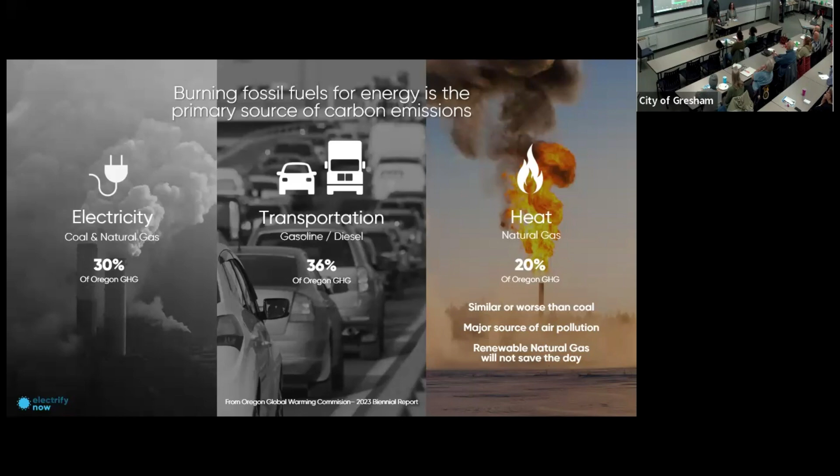In California, for example, a lot of the electrification work that's going on there is driven by air pollution. And of course, you might be hearing from the gas utilities that renewable natural gas is going to save us, and it's going to be the thing that just makes us able to stay on the gas system, but that's just not true. There's just not enough of it, for one thing. And it's also still burning. As soon as you burn anything, there are really nasty byproducts that are created from that are part of the air pollution problem in the United States. So that renewable natural gas is not really a solution.

The solution is, and this is the good news, and the thing that is the future is that there is so much energy available from the wind and the sun. And you can see from this chart here, the cost to get wind and sun energy has gone from being really expensive to being now the cheapest source of new energy, cheaper than gas, cheaper than coal, cheaper than nuclear even. So this has happened over the last 20 years. And the projections are that these costs are going to continue to go down.

And again, this is because it's the same thing that's happening with heat pumps, that the more of these things we make, because they're widgets, right? They're solar panels. The more solar panels you make, the cheaper it becomes to make them. Same is true with wind turbines. So these prices are going to go down. And this is why this is inevitable that we will be switching to these renewable sources because they're so much cheaper. But right now there's a lot of headwinds associated with that.

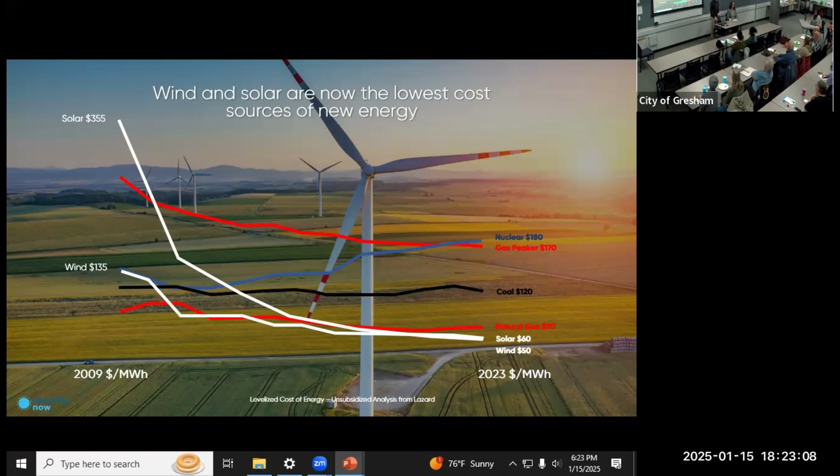And this is why all of us can play a big part in this by putting solar on our roof, which we'll talk about, or embracing other forms of renewable energy like community solar, and being part of this electrification movement to move away from burning fossil fuels in our own lives.

Okay, so let's think about this from a household perspective. As a kind of regular person, the data shows that about 60% of the emissions that we're responsible for as regular people comes from the energy that we burn in our homes. So yes, there's emissions related to the food we eat and the products we buy, et cetera, but 60% of our household emissions are from burning fossil fuels. And the big ones are our electricity consumption, which we'll talk more about.

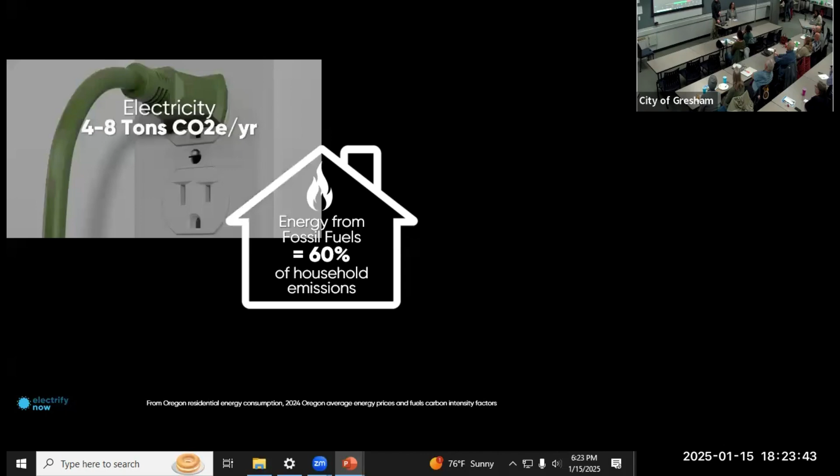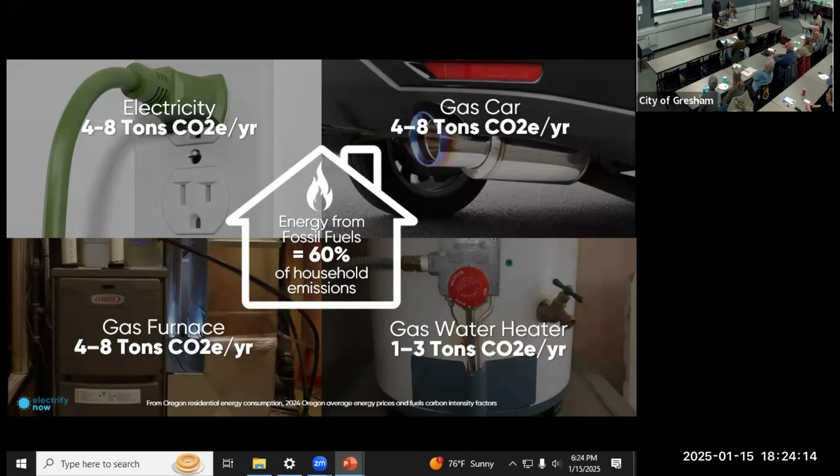Like one gas car is 4 to 8 tons of carbon emissions. A gas furnace is about the same. And of course, these numbers will vary depending on how big your house is, how much you drive, et cetera. These are average numbers for Oregon. A gas water heater. These are the 4 largest sources of carbon emissions in most of our homes. And if you have an electric home now with an electric water heater, it would be slightly less, but still these 4 things are the largest consumers of energy in our homes, and therefore the largest sources of carbon emissions.

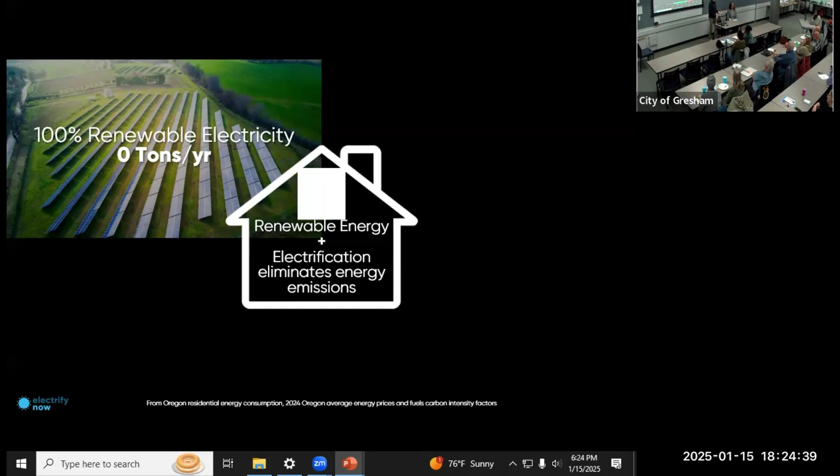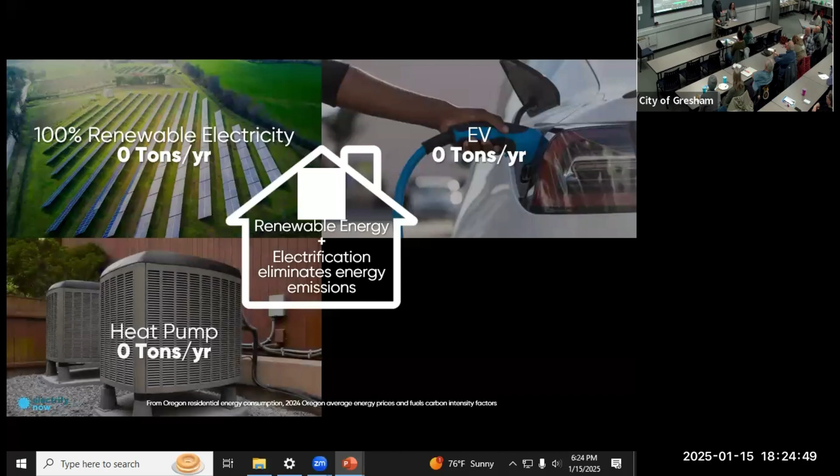There is a huge opportunity when we combine renewable energy and electrification to eliminate those emissions. We can get renewable energy for electricity. The state is on the way towards doing this. We have laws already in place that are mandating that we get to this, but you can do this right now in your own home by getting solar on your roof or subscribing to a community solar program. Then you can use that clean energy for your transportation. So now that's 0 for driving around, and 0 carbon emissions for heating and cooling your home, heating your water.

So when you look at this in total for an average home in Oregon, and again, this is going to vary depending on the size of your home, but an average home with 2 cars is 27 tons of carbon emissions every year. It's kind of mind-blowing. You don't see this, but this is what is happening through burning fossil fuels. And if you electrify that home today with the grid the way it is, you would cut those emissions in half just because of this incredible efficiency of these devices we're going to be talking about in just a minute.

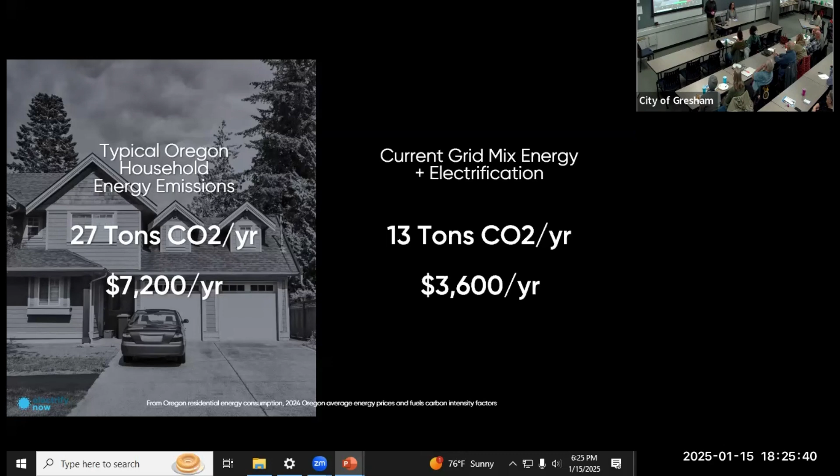And you'll cut your energy bills in half as well, which is one of the reasons why this is exciting, because a lot of people may be motivated to do this from an environmental standpoint, but there's lots of personal benefit reasons to do this as well, and we'll talk about those as we go.

But cut your carbon emissions in half, and then of course, as we go towards renewable energy, with an all-electric home, it's possible to get to zero emissions. It will never be possible to get to zero emissions if we're burning fossil fuels in our homes. So that is why this is such a powerful thing for us to know about and to think about doing.

That's why you hear people talking about this idea of electrifying everything, which is kind of conjuring up this future where we get power from the wind and the sun for our electricity, and then use that electricity for transportation, and use that electricity for heating and cooling our homes. And there's these incredible side benefits.

You know, I came into this conversation really focused on carbon emissions, but I realized from doing this that there's unbelievable energy cost savings that roll up to hundreds of billions of dollars when you look at the United States in general, as we transition away from fossil fuels.

It delivers clean air, because think about it for a minute, where does air pollution come from? It comes from our cars that burn fossil fuels. It comes from power plants that burn coal, etc. So it comes from burning stuff. So the sooner we get away from burning things, the cleaner our air will be.

There's amazing amounts of water that's used for processing fossil fuels that could be available for much better uses like drinking or agriculture, for example. All this leads to healthier people, which means that we're spending less money on healthcare and less money on energy, which is better for the economy. So there's lots of exciting reasons to do this beyond just the environmental impacts.

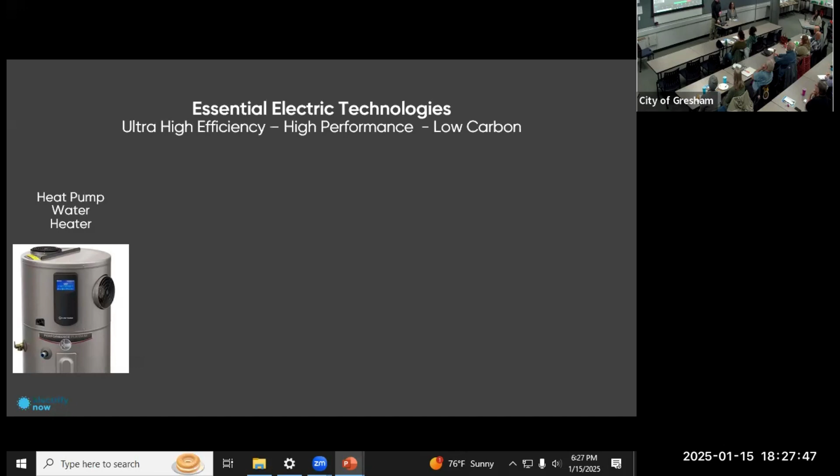So heat pump water heaters, we'll talk more about it. Heat pumps for space heating is another key technology. Induction for cooking is so much better than cooking with gas, even though gas has this reputation as being the best cooking technology. It gets blown away if you ever experience induction. We'll talk a little bit about that.

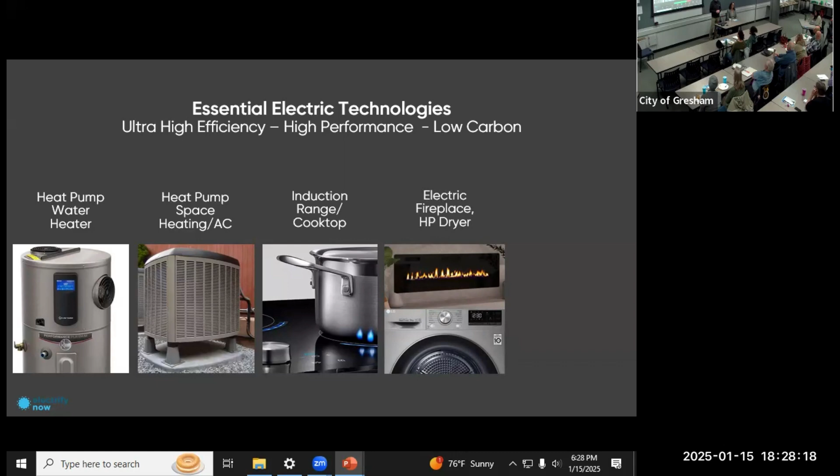We won't be talking about this so much today, but even electric fireplaces are out there. It's a thing. You wouldn't even know the difference between an electric fireplace and a gas fireplace if you saw one, but they don't burn fossil fuels. Heat pump dryers are incredibly energy efficient. And then, of course, electric vehicles, which we will talk a little bit about. But this is kind of the suite of technologies that enables us to take any home, any apartment building, any commercial building, and get off of fossil fuels for heating and cooling and cooking, etc.

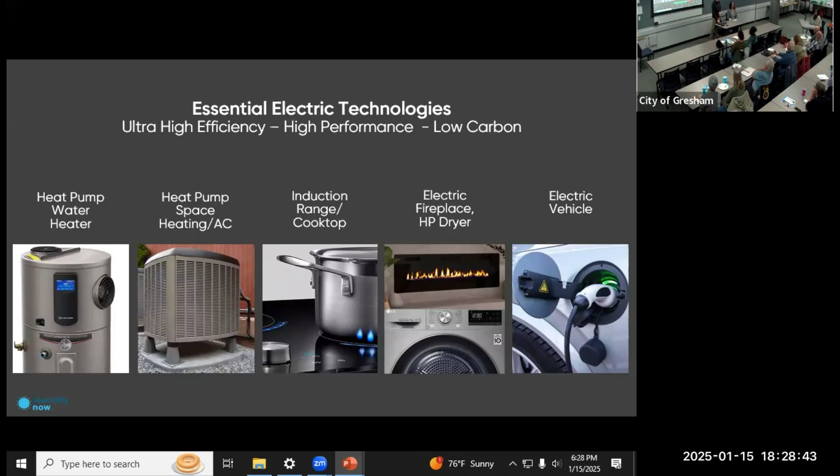Okay, so you've already heard me say this word heat pump many times, and a lot of the technologies we're talking about relies on heat pumps. They're really incredible devices. I'm not even going to try to explain how they work because they're a little bit magical in some ways. But I think the simplest way to understand them is that they've been in our lives forever. A refrigerator is a heat pump. The air conditioners in our cars and our homes are heat pumps. So this technology has been around literally for 100 years. It's just become more and more perfected over time.

The way a refrigerator works is that it's moving heat from inside that box into your kitchen. You don't really notice this, but your kitchen is getting slightly warmer because your refrigerator is getting colder. If you put your hand behind there, you can feel the heat coming out of it, or sometimes there's heat being evacuated from underneath. It can be literally freezing inside your refrigerator when it's 100 degrees in your kitchen.

So these things are incredibly efficient in moving heat from one place to another, and use little tiny motors and pumps, very little energy to move heat from one place to another. So that is the magic that makes a lot of these things work. A heat pump water heater is, in some ways, the easiest to understand because it's like a refrigerator in reverse.

So instead of making your room warmer by cooling what's inside of the refrigerator, a heat pump water heater is going to make the space that it's in slightly cooler in order to absorb that heat and concentrate it into the water that you're using. So they look just like regular water heaters, but they're absorbing heat from the air, exporting cool air, and then using this refrigerant that circles around the water tank to heat the water.

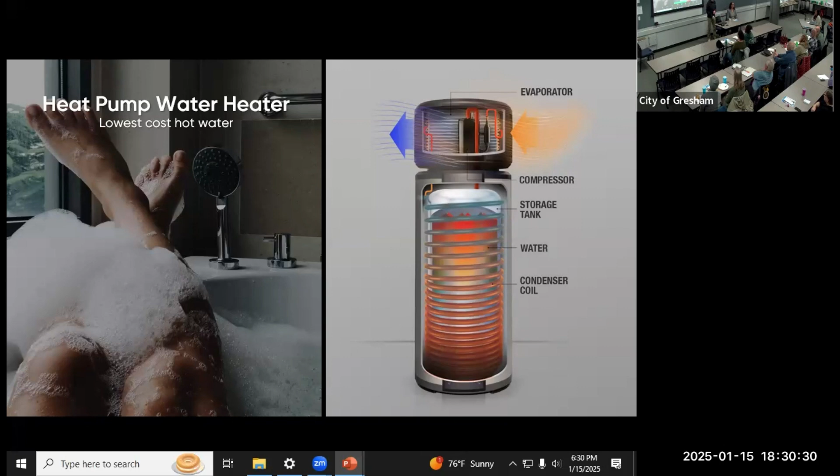And you can get water up to 140 degrees or even hotter with this technology. Plenty hot for what we need in our homes. All the major manufacturers who make water heaters today are making heat pump water heaters. They've been around for over 20 years now. They have incredible warranties. This is not some kind of fringe technology that's brand new.

A warranty on a gas water heater is 6 years, by the way. A warranty on a heat pump water heater is 10 years. It gives you an idea of how much confidence the manufacturers have in this technology. This is here to stay. The federal government is essentially trying to get this to be the new standard for water heaters, period. And one of the reasons for that is what you see over here, cost of operations.

A heat pump water heater on average is going to cost a little over $100 a year to operate, compared to the most efficient technology out there, a gas tankless water heater, at 350. So that's 3 times more money every year you're spending for what was the most efficient technology until heat pumps came along. So heat pumps just blow everything away in terms of cost of operations.

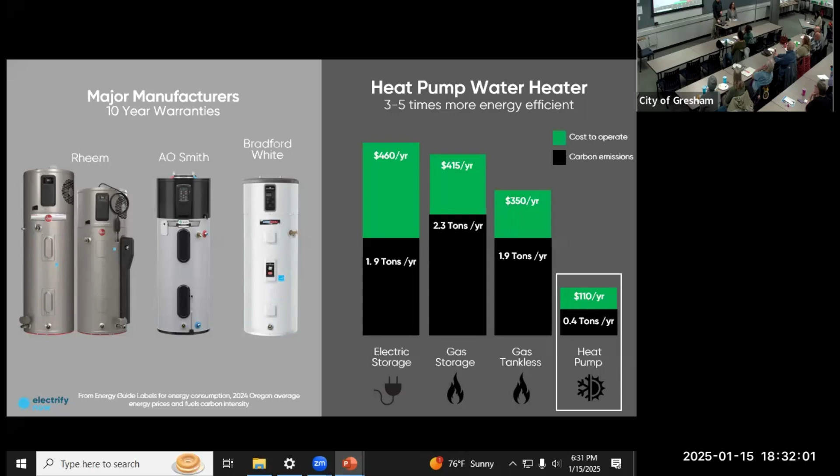And because of that energy efficiency, it also means that the carbon emissions they produce are teeny compared to these other technologies. And if you do what you're going to hear about in just a minute, this would be zero, literally zero, because if you're powering this with renewable energy, this goes to zero. There's no way for this to be zero, because they're burning fossil fuels. So really amazing technology. There's unbelievable incentives.

We'll talk more about this later, but this is information that's available on our website: you can purchase a heat pump water heater for $700. They retail for more like $1,600. That's an incredible savings. That essentially makes these things about the same cost as installing a standard low efficiency product. That's why the incentives are so important. So more about that to come, but that's one of the key technologies.

The other one is heat pumps for space heating. These things have also been around for a long time. Some whole countries use this for space heating, like Finland and Norway. Really cold places have been using heat pumps for a long time. So there's no reason to think that these things aren't going to be powerful enough to heat our homes here in the Northwest. The coldest places in America, like Alaska, Maine, and Vermont, are embracing these devices.

They are incredible because, one, of their energy efficiency we'll talk about, but they also lead to more comfortable homes because they operate relatively consistently. If you think about a gas furnace, for example, when you turn it on, it's creating unbelievable amounts of heat, way too much heat to really use, like thousands of degrees, literally. So the way that you make it work is you turn it on and off all the time so that your house doesn't get too hot.

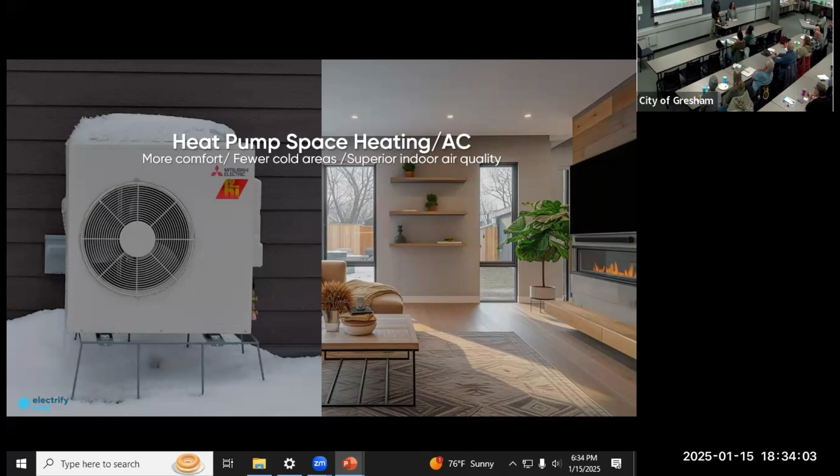And with a heat pump, it's producing temperatures that are more like 120 degrees or maybe even less. It depends on the situation. So they're operating almost continually. And what that means is that you've got more air through your filter, which means cleaner air. You have that air moving into every corner of your room. So you're likely to get really consistent temperatures throughout your whole house, no cold spots, which leads to noticeably more comfortable homes. So they're good from that standpoint, and we'll see the energy efficiency standpoint in a minute.

They come in basically 2 forms. You see them in what's called a ducted or central system. So if you've got a gas furnace now, for example, you would replace that gas furnace with an air handler, which is blowing the air through the same ducts you already have. You have this external unit that's harvesting the energy from the air and then converting that to either heating or cooling, because it can do both, which is one of the other magical things.

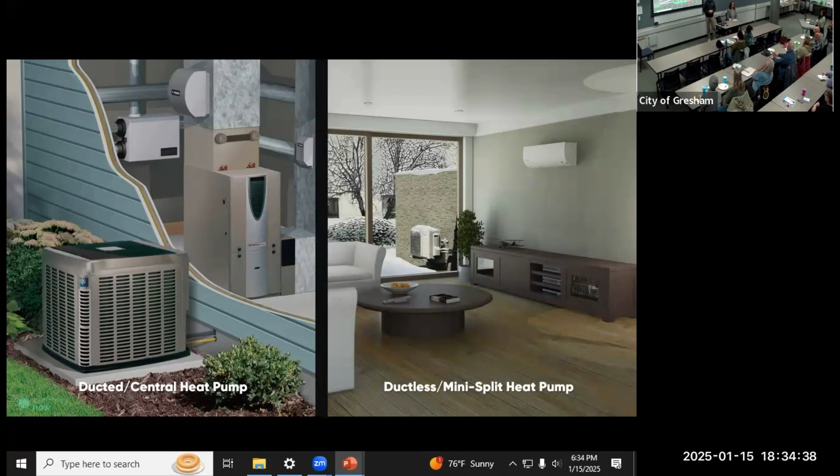It essentially replaces an air conditioner for cooling. If you don't have ducts, if you've got electric baseboard heating, then one of these ductless systems would be what you want. It has a similar unit outside, but instead of blowing air through ducts, there's these mini splits, they're called, or high wall units. They're usually mounted in every room to blow warm or cool air into the room for conditioning. And in some homes, you might combine these.

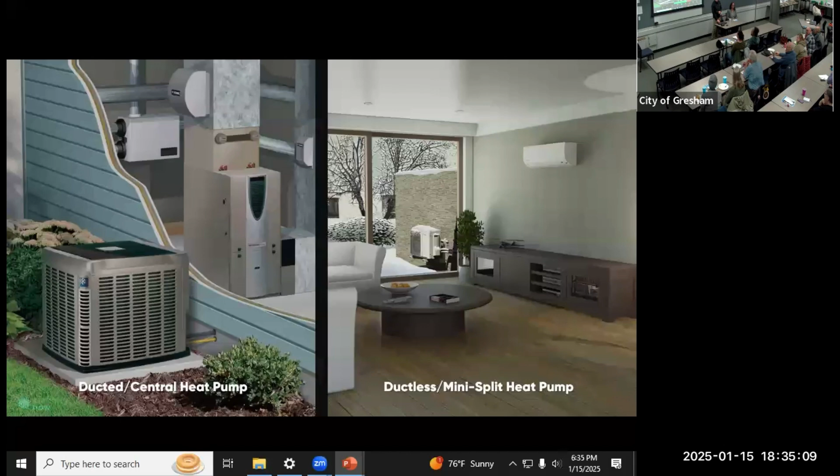Yes? I have a heat pump in my house right now. And when it gets down to about 34, 32 degrees, my electric strips come on. So are the new heat pumps made differently so you don't have to use electric strips or what?

That's a great question. If you didn't hear that question, basically the question was about what happens when it gets cold, because some of the older generation heat pumps will work really well till about 30 or 35 degrees, and then they'll switch to some sort of backup heat, either a gas furnace or electric strip heating, electric resistance heating. So a lot of us might have these older heat pumps that have this backup situation, which is electric resistance. And that actually typically works fine.

You might not even notice it, but one of the downsides of that is it's more expensive when you switch into resistance mode, because now you're not as efficient. So your bills are going to go up. And it's not a great thing from an environmental standpoint as well, because you're just using more energy. So the newer versions of heat pumps are capable of providing heat down to 5 degrees or lower. Some of them will go down to -13 with all their rated output.

So there is this new generation of heat pumps available that make it possible not to need that kind of backup resistance heat, particularly here where we have a climate where it's very rarely going to get below 20 degrees. And even if it does, these things are going to keep your house warm. So if you're thinking about this, make sure you have a really good conversation with your contractor about what that set point temperature is, where it would go into backup heating. Typically, you're going to spend a little bit more for a unit that is capable of going to lower temperatures, but you're going to get that payback by lower energy bills.

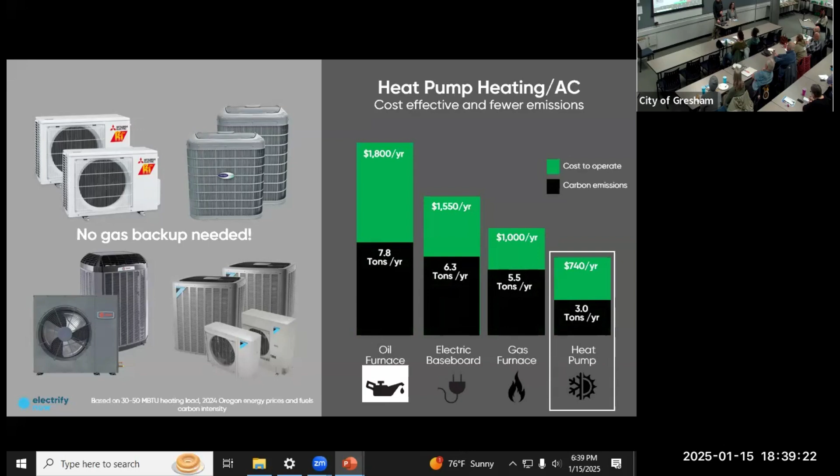And the other thing that I think is really exciting that you see happening, I pay very close attention to this. You know, 5 or 6 or 7 years ago, gas furnaces were massively outselling heat pumps because that's just what people knew about. That's what people were comfortable with. But as more and more people understand the advantages of heat pumps, this has completely changed. So now the vast majority of systems being sold are heat pumps because people just get it.

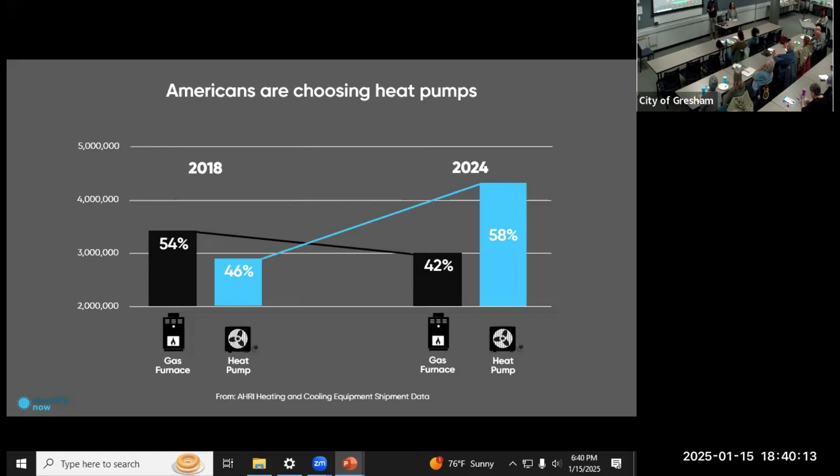They're better. And I think in 2025 these numbers are going to go up and these numbers are going to continue to go down for this reason. So what I like about showing this is, if you're thinking about doing this, it's not like you're alone or that you're on the cutting edge of technology. This is a big movement that's happening across the country.

Question over here. I had some questions of the company we work with. I was wondering if there's any resources out there for... Yeah. I really had trouble finding. I love that question. The question was essentially, to paraphrase, the contractor that she worked with, and this is not uncommon, might not be very familiar with heat pumps, or they might prefer to sell you a gas furnace because that's what they're most comfortable with.

This is not uncommon. So I think one of the things that's hard as consumers, when we call an HVAC installer and that person is sitting across the table from us, they're kind of the expert, right? Not us. So if that person says, well, if it was my home, I'd put in a gas furnace, it's hard to argue with that, most likely a guy, because they've been doing this their whole career. But the truth is that if you find the right contractor, there are people who've installed hundreds or thousands of heat pumps, have had really good success, and know how to answer your questions about what's right for your home.

So at Electrify Now, we realized early, because we had this experience with our own home where someone was trying to talk us out of these things, and we have developed a list of contractors that we feel really comfortable with, that know the technologies and give you good service. In some cases, they'll even pass on a little discount because we send them a lot of business. We don't want to make money off that. That's not who we are. We're a volunteer organization. We'd like to pass that savings on to you. All that information is on our website. I'll show you later, but it's really important to make sure you're working with the right person.

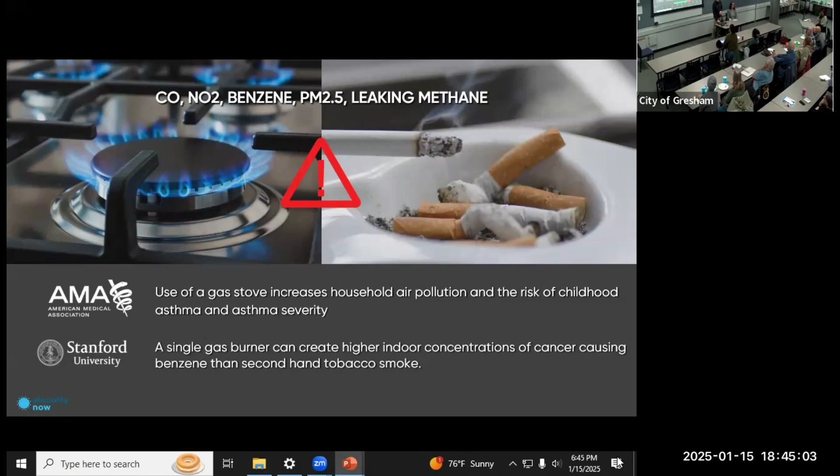The American Medical Association said that your kids are 42% more likely to develop asthma if they live in a home where a gas stove is being used to cook. And Stanford has said that even a single gas burner in a stove is basically like having secondhand tobacco smoke in your home regarding your risk of developing cancer from benzene and other chemicals that come from that. So it's no joke. These things are not safe.

Induction has none of those problems, but it also doesn't leak methane into your homes, which is also a problem more and more that we find with gas appliances. There's no risk of fire, essentially. The surface stays cool because the only thing that gets hot is the pan. The molecules in the pan are excited by this induction coil. And so you get incredible energy efficiency from that, but also real safety benefits.

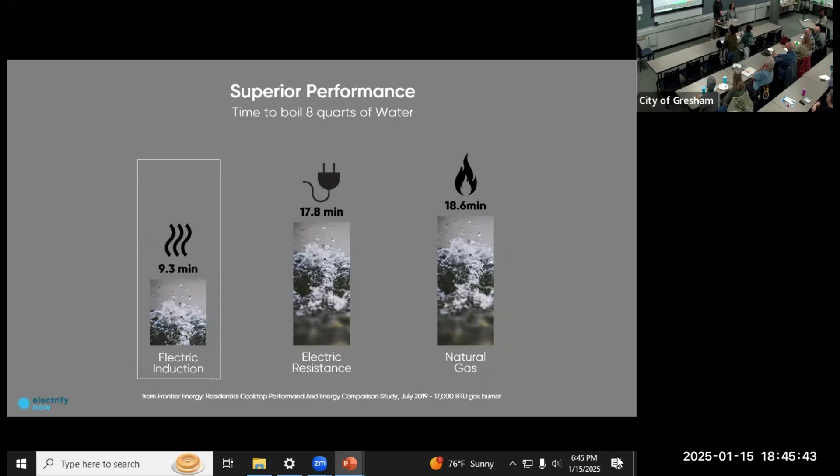And they also heat your water or anything faster. This is a study that was done by an outfit in California. Literally twice as fast to boil water with induction than even a really big gas burner or electric resistance. So lots of reasons to be excited about it.

Finally, just on electric vehicles, most of us kind of understand electric cars. You see them more and more. If you've ever driven one, you'll know they just blow everything away in terms of acceleration, cornering, you name it, in terms of performance. But one of the things that most people don't appreciate about EVs, because we all have this impression that they're more expensive, which is true to some degree because the sticker prices are higher.

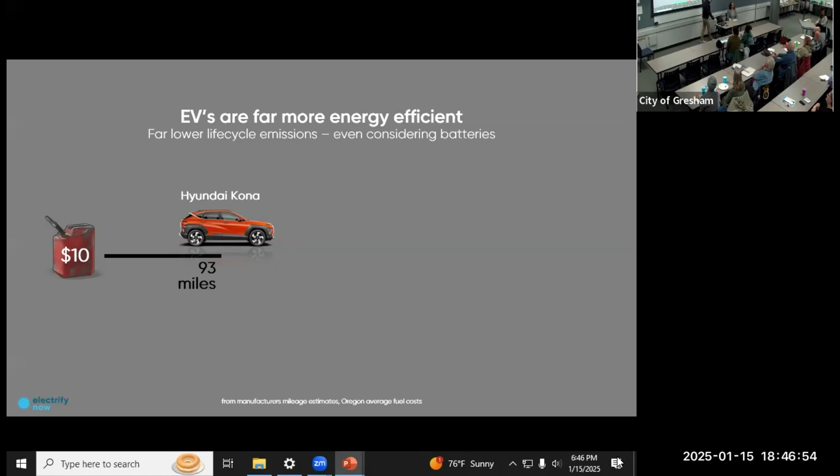But check this out. This is a comparison between two versions of the same car, the Hyundai Kona, which is a really nice little gas car. Gets about 32 miles per gallon. So with $10 worth of gasoline, you can go about 93 miles. The electric version of the exact same car, you could hardly tell the difference, except this one's got an electric motor in it. For $10 worth of electricity, you can go 262 miles.

So this is why the industry recognizes that this is inevitable, but it's also why, even though that sticker price is higher, and those things are getting closer and closer all the time, this one is about $8,000 more than that one right now. It used to be 12. But when you factor in the rebates that are available and also this cost of ownership thing, within 5 years, you're saving thousands of dollars every year. So no reason to be shy because of the sticker prices. And then, of course, from a carbon emission standpoint, these electric vehicles blow the gas ones away.

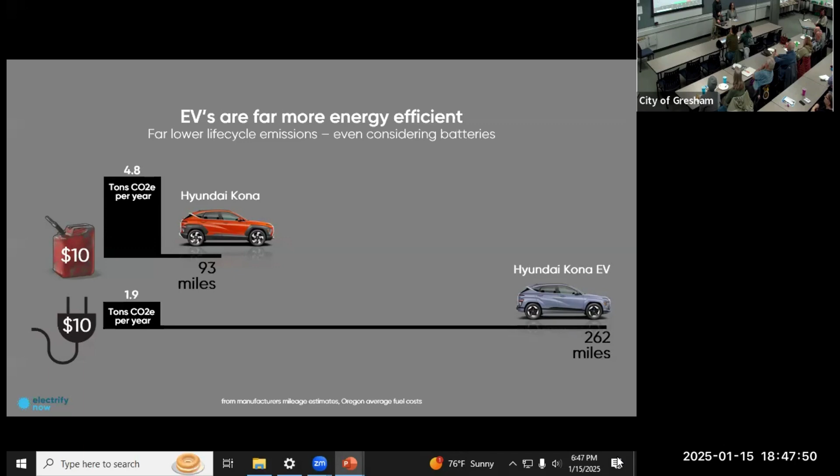And this is a really good apples to apples comparison of these two vehicles. You're at less than half the emissions, and it goes to zero if you use renewable energy. And again, the same thing is happening here as with heat pumps. It was roughly 10% of auto sales last year, up from like 1 or 2 just a few years ago. And here in Oregon, it's 16% of sales. That's why you're seeing more and more of them on the road. People are getting the word.

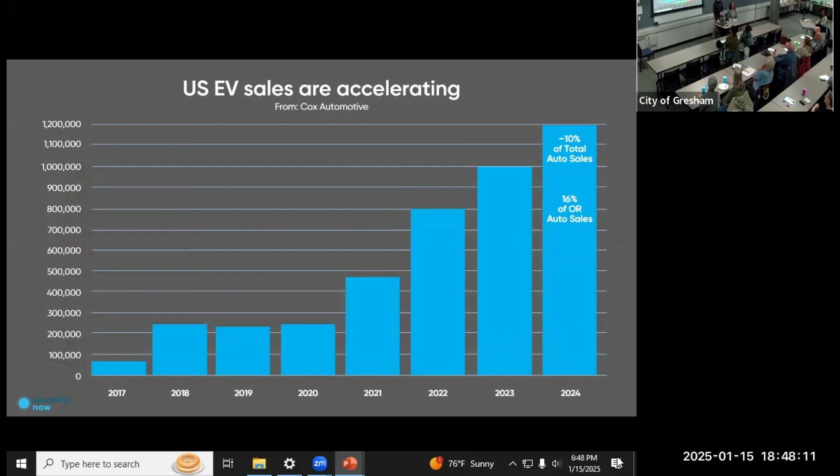But the IRA provides these amazing federal tax credits. So if you have a tax burden now, you can get incredible tax credits. Sorry, I was struggling for the words, not rebates. Tax credits for some of these devices, like it's $2,000 for a heat pump water heater, $2,000 for a heat pump. But the state, like through the Energy Trust of Oregon, has huge incentives for water heaters and heat pumps also. You combine that, you're talking about thousands and thousands of dollars that's available to you.

A lot of these have different income requirements, et cetera, and some of them come from utilities and have different utility requirements. So you really need to dive into your personal situation to know what number is out there for you. But these are big numbers, including for EVs, energy audits, weatherization, et cetera. Question? So these companies that you've done some research into locally, installers, so on and so forth, they're gonna know about all these things?

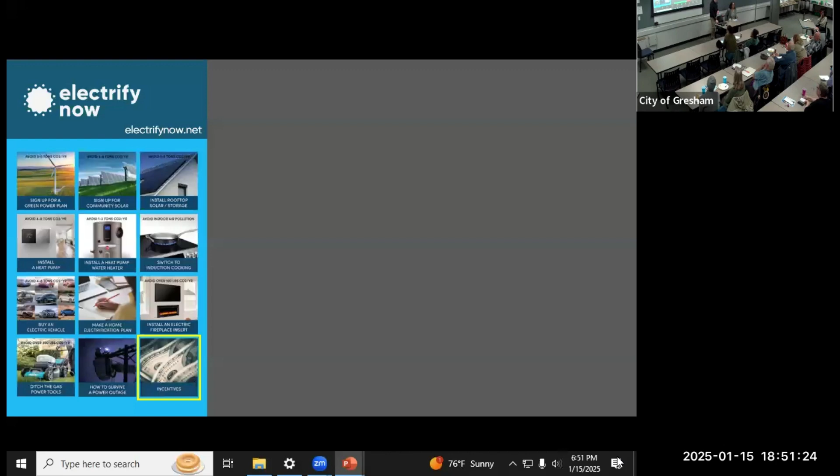Here's some sources. First of all, this is our website. If you go to our Take Action page, it looks like this, with information about how to do all these things that we just talked about, depending on what you're interested in. If you're interested in an electric vehicle, go there, etc. And then there is this incentives page, which has really good information about the incentives that are available from the federal government and other places.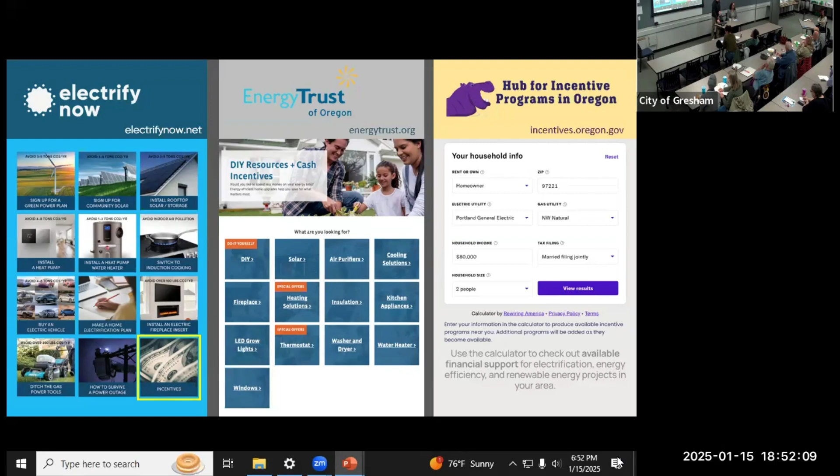Incentives.oregon.gov and energytrust.org and electrifynow.net. Those are the three that I would recommend you check out.

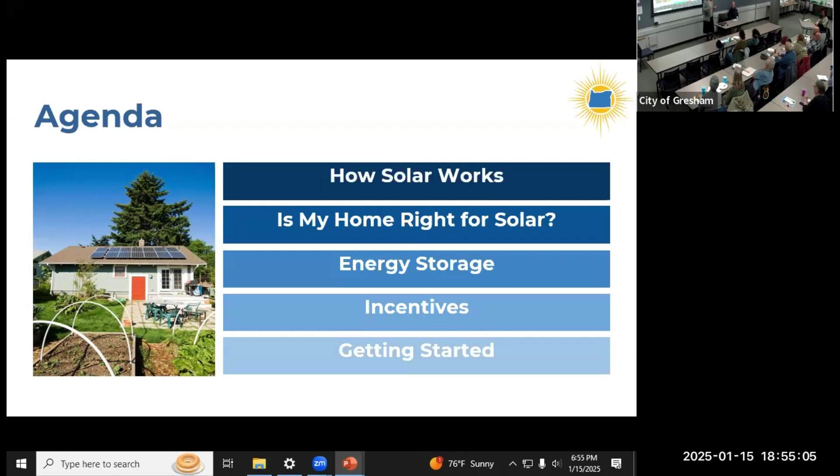So a little bit about Solar Oregon. We are a nonprofit, and we really focus on education. So educating folks about solar and storage. We do that through events like this, workshops. We also do tours in person. So we had a tour yesterday, which is great. So if getting in person and checking out local projects is something that you'd want to do, you can follow us and join more of our events.

And then we are a member-based organization, and so our members do get discounts on our Go Zero tour, which is our annual tour of homes that have solar and are on a path to zero energy. Does anyone know what a zero energy home is? We use that terminology. Yes. Is it like the living building challenge? That's a good direction. Yeah, you're bringing up a lot of terminology.

So for zero energy buildings, they usually have a lot of these energy efficiency measures that Brian talked about, like heat pump water heaters, so that they're reducing their footprint. And they usually have solar and sometimes storage so that they can use renewable energy. And then passive house is another term that you brought up. Passive house is a way of designing houses to be more efficient in their design. We have an annual tour for that. So if that's something you're interested in, you can join us in the fall. We have some in-person sites, and it's fun to go see what your neighbors are doing and what energy efficiency and solar projects they have installed in their home.

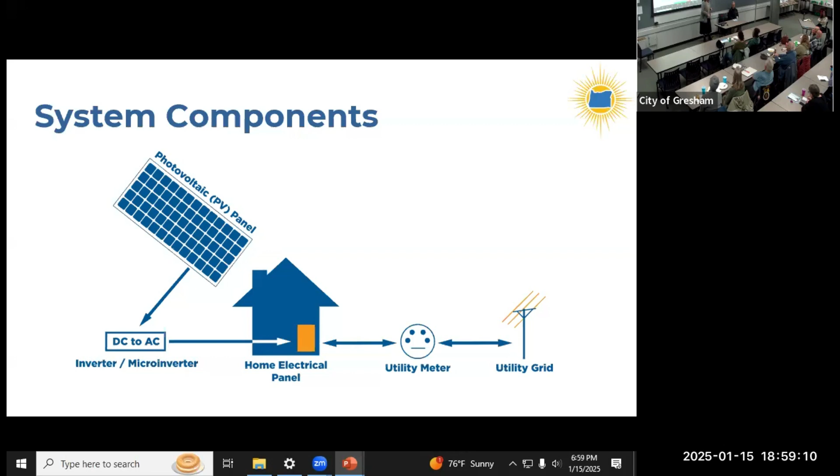And then there's a special agreement called net metering. And so this is the agreement where you get credit for the energy that you send back out to the grid. So has anyone heard of net metering before? Yeah, okay. So here in Oregon, you can do net metering. And so for PGE, it's a 1-to-1 right now. And so when you sign up and you get your solar and you're interconnected, you will be part of this net metering program where you can gain credits.

And this credit system, it starts during the sunnier months. So it's actually going to start in April so that you can build up credits from the electricity that you produce with your system. And it's going to build a bank of those credits that you can pull from when you need to draw from the grid.

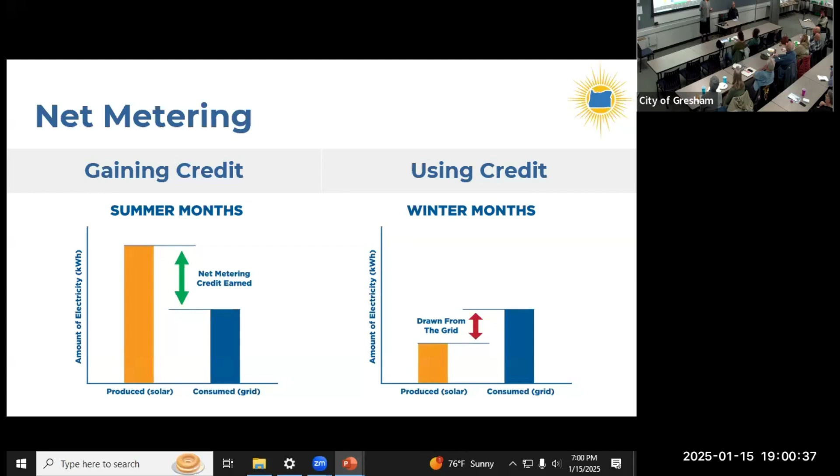So you can see here a typical summer month. So you might be producing more. It's sunny, it's not cloudy. We have less rain, so you're producing more. And you might be producing more than you consume depending on your system, because like I said, it's really customizable. And so you'll have a net metering credit earned, and that would go into your year-to-date bank. And then you could pull on that in a winter month when your system might be producing less.

Like I said, the net metering year starts in April. And so it goes all the way through March 31st. And at the end of that, you don't get like a magical check payout for that. What happens is that anything that you don't use will be donated to the grid to low-income subscribers. So it is still doing good, and you're sending that energy out to your community. But it's really important to match your consumption to your system design so you're not ending up with a ton of extra export.

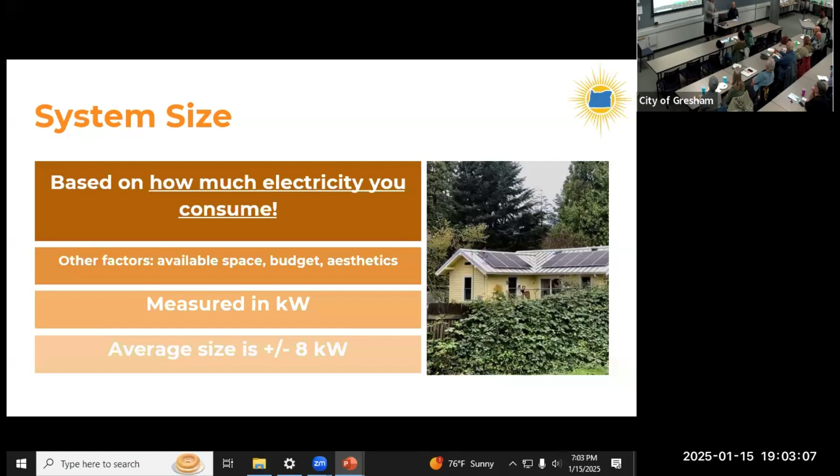All right, so we're just going to jump into some ways you can assess your home and decide if it's right for solar. First, you need access to the sun. Pretty obvious, right? So you need to be getting some sunlight on those panels so that you can create electricity. And so here in Oregon and most places, the south-facing roof is going to be the best. Solar is also installed on east and west facing, but you normally will not see solar installed on north-facing roofs.

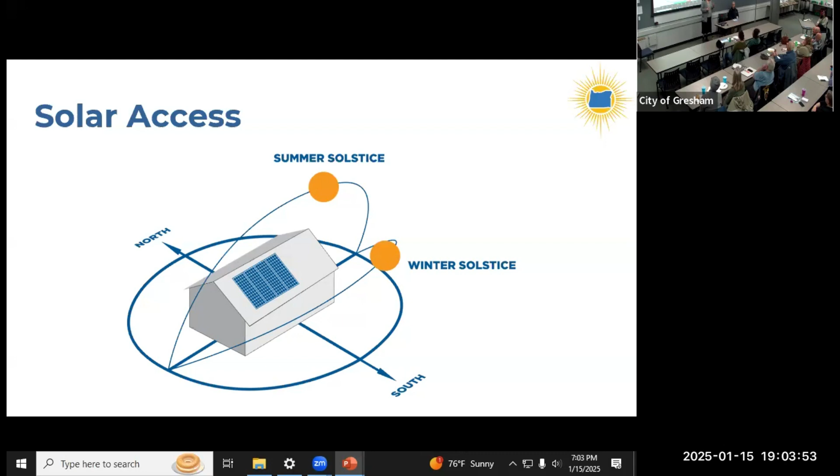So if the only roof that you have that's not covered by shady trees is north facing, maybe you can look at other options like putting the solar on a different outbuilding or doing ground mounted solar or even participating in community solar.

So I talked about shade. Trees are great. They have a lot of good positive benefits for your home. So don't be sad and lament if you have trees. They're still good. It's just if you're fully shaded out, it's going to be harder to install solar on your roof.

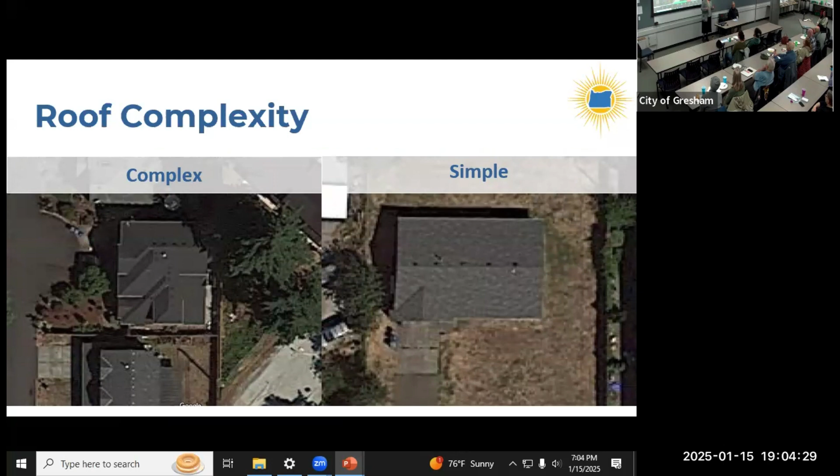Roof complexity also plays a role in the system design. So for a roof that is more simple and maybe has less steep pitches, it's going to be easier to have a simple system installed. Roof condition and age plays a huge factor in installing solar. Does anyone know on average how long solar panels last? Any guesses? Yeah, so 20 to 25 years.

So if you have a roof that doesn't match that lifespan, let's say your roof needs to be replaced in 5 years, if you were to install solar, you'd have to uninstall it, put on a new roof and reinstall, and that creates an additional cost. So if you are re-roofing, that's a really good time to go solar because you can match the lifespan of your roof with the lifespan of the solar panels.

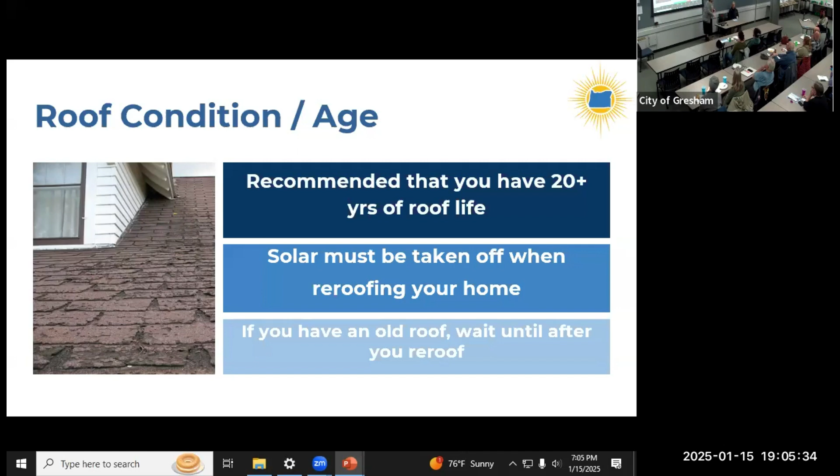And then as far as different types of roofs, solar can be installed on many different types of roofs. Contractors usually have experience with multiple types, and most of them are suitable for solar. There are certain engineering requirements required to install solar on your roof. So a lot of new houses will have trusses and have more supports to support solar, but that doesn't mean if you don't have trusses, you can't get solar.

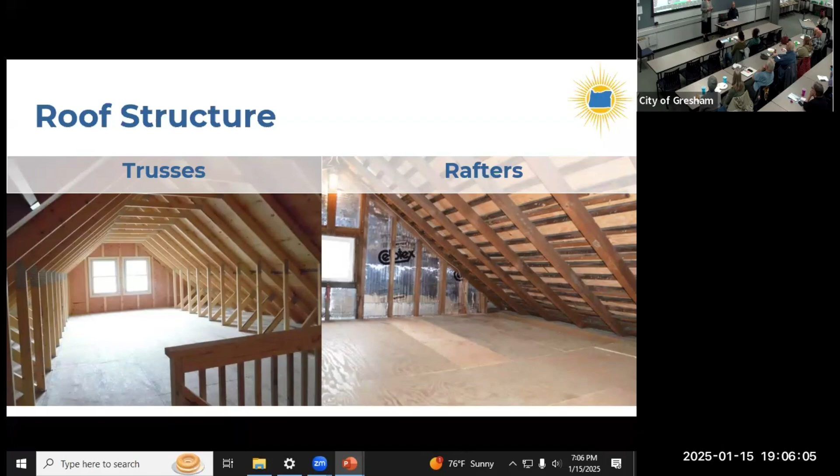It's just something your contractor will be looking at to make sure it meets those requirements. And if it doesn't, sometimes that just requires some extra supports being put in, some additional engineering. So just keep that in mind when you're thinking cost.

If your roof is not an ideal candidate for solar, or maybe if you rent, you can get community solar. So that is an option where you would subscribe to a system that's installed elsewhere, and it can still help save you money on your energy bill. In Oregon, we have the Oregon Community Solar Program, and there is a standard program and also an income qualified program. So Community Energy Project helps folks with the income qualified program.

So is anyone familiar with the topic of energy resilience? It's a word that's being more and more used in Oregon. Yeah, so exactly. So energy resilience is that ability to access power during emergencies, when there's an outage, when the grid might be down. And so a lot of people are considering that when they're thinking about adding solar, they're doing solar plus storage, because solar can make storage more effective. You can recharge that battery.

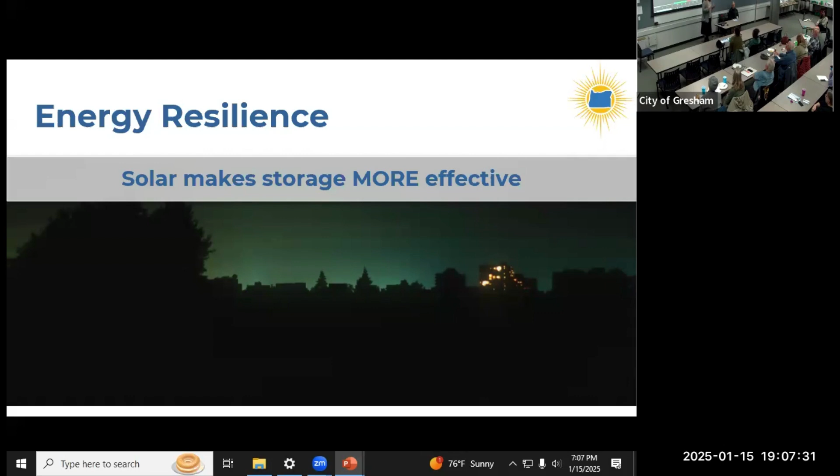So for picking a battery, there's many different brands and chemistries. Right now, lithium iron phosphate is pretty popular. And the average battery size right now is about 13.5 kilowatt hours. Different installers might specialize in different batteries. So Brian brought up getting at least 3 quotes if you can from contractors. This is the same for solar and storage. It's great if you can get 3 quotes.

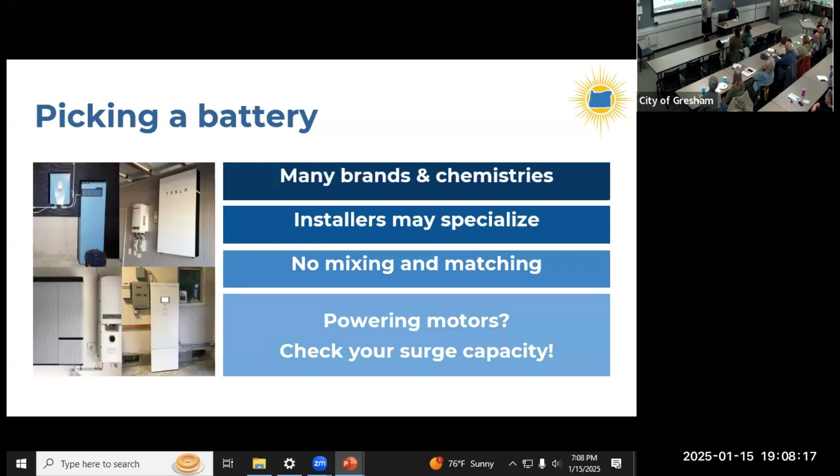Because different installers might specialize in different panel modules or different batteries or inverters or microinverters. And so that can give you some more options, and also make sure that you're getting the best system for your needs.

And then, yes. What's the difference between an inverter and a microinverter? Yeah, so the inverters are like the more traditional old school string inverters. So it's one inverter that's connected to a whole array. And so what can happen with that if you don't have optimizers is if part of your array is shaded, you can lose production on those panels.

With microinverters, it's a smaller inverter that's attached to 1 to 3 panels, and it actually will be on the back of the panels. And so that can help with shading if you have partial shading on your roof. Yes.

With thinking of energy resilience, some folks are interested in backing up their home and their electrical panels, and there are a couple ways to do this. There's partial backups and whole home backups. And with partial backup, you're selecting specific circuits in your home to back up, and you would need less batteries to do that. To back up an entire home, especially if your consumption is high, you would need a lot of batteries to do that so that you could charge all of those and then be able to pull from them and have that last longer to back up a whole home.

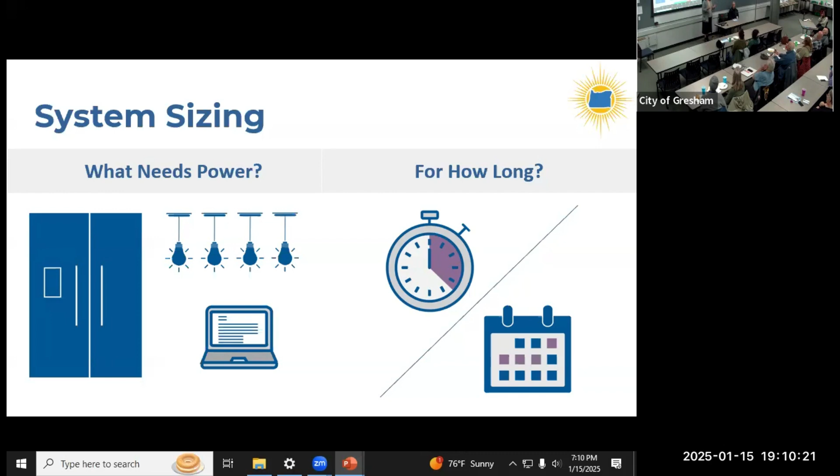So a lot more practically, people are doing partial backups. And when you're considering what circuits to back up in your home, this is another conversation that you'll have with your household and your contractor, thinking about what needs power and for how long. Common things to back up are refrigerators, a common room with an outlet to charge laptops, phones, etc. So partial backup can help with that. And you can do that with 1 to 2 batteries instead of a whole battery bank.

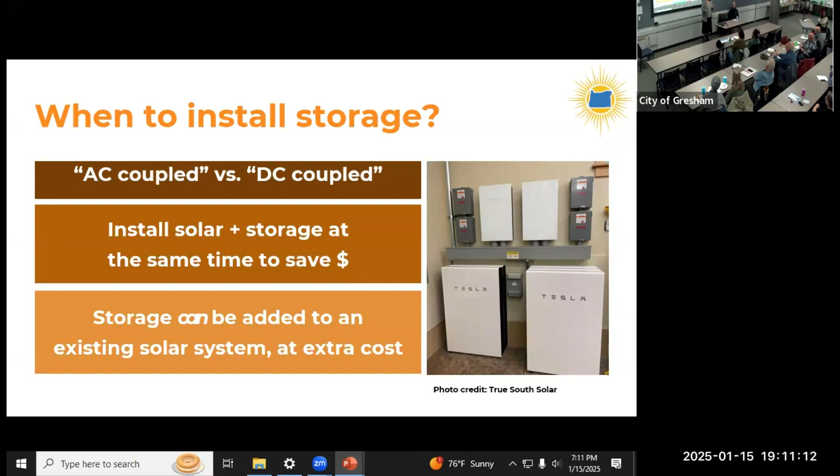When to install storage. So thinking about planning, if storage is something you're interested in, that's great to tell your installer when you're installing solar or looking to install solar, because then they can incorporate that into the design and how your system is going to function. If you do it later, sometimes there'll need to be new conduit runs, sometimes inverters need to be swapped out, so it can increase your cost. So if you're looking to go solar and thinking about storage, it's good to have that conversation and think of that planning. Storage can be added to existing systems, and it's just a matter of the contractor assessing your site and also your needs and seeing where that can be incorporated.

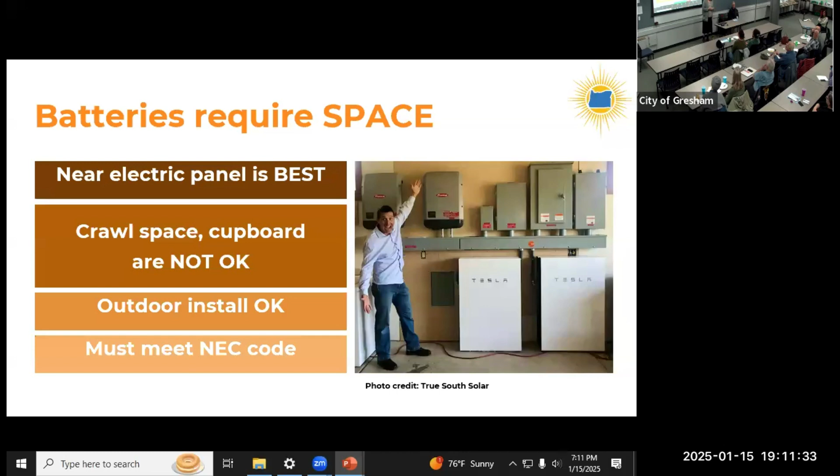Batteries do need space, not usually this much space. This is a pretty big storage system, but they do have to meet National Electrical Code. So you can't just shove them in a small cabinet somewhere. So they need to be accessible. And so that's something to think about when you're thinking about storage.

All right, incentives. So there is the solar investment tax credit. So who's heard of this ITC solar investment tax credit? Okay, great. So this is 30% of your total cost of your system, and it covers both solar and storage. And it's a dollar for dollar tax credit. I'm not a tax professional, let me disclaimer that. It's good to ask your tax professional how to claim it. It's pretty simple, but there are some myths and misconceptions.

So something that we've seen online is that you can claim a re-roofing under this tax credit, and it's not covered for solar and storage. If you were getting something like solar roof tiles, which is solar and roof product combined, that is covered under the ITC solar tax credit. But if you're just looking to repair your roof, that's not covered. So it's great if you can let your tax professional know this is something I'm interested in doing to make sure that you get your full tax credit.

And it can be applied over multiple years. So if you don't have enough tax liability in the first year, you can apply it in the next year. And so right now that is out until 2035. But with policy changes, things like that can change. But as of right now, that is the date that it is set to expire.

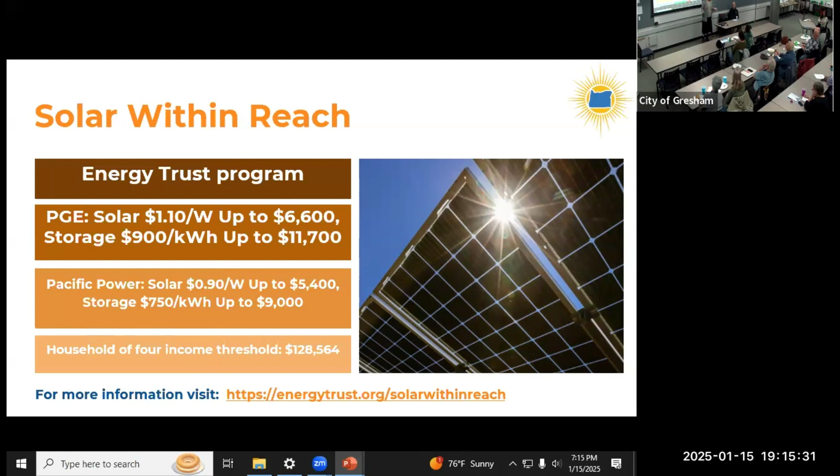The condition of the roof? How many panels? Yeah, exactly. How big is your system? Structural upgrades, if you're adding battery storage, like what type of inverters are used? Are you adding to an existing system? And then the access to the incentives too can also impact the cost.

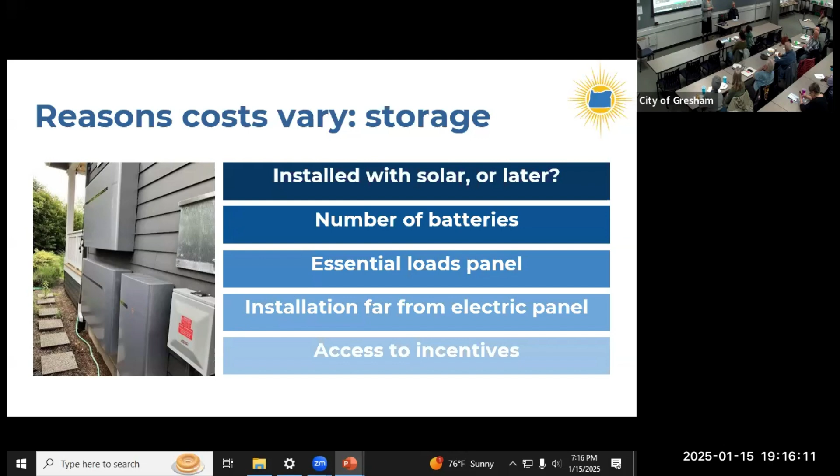Like we mentioned, solar and solar plus storage are highly customizable. So there isn't just a one size fits all. A lot of these systems look different and they're tailored specifically to that site. And then same with storage, costs can vary as well. But it's great to see that there are incentives right now for storage. So if that's something you're interested in, it's good to see if that makes sense for you.

And this is, oh, go ahead. Just got to say, do you have a plus or minus average number you can cover? Yes, I do. Thank you. You placed that question so perfectly.

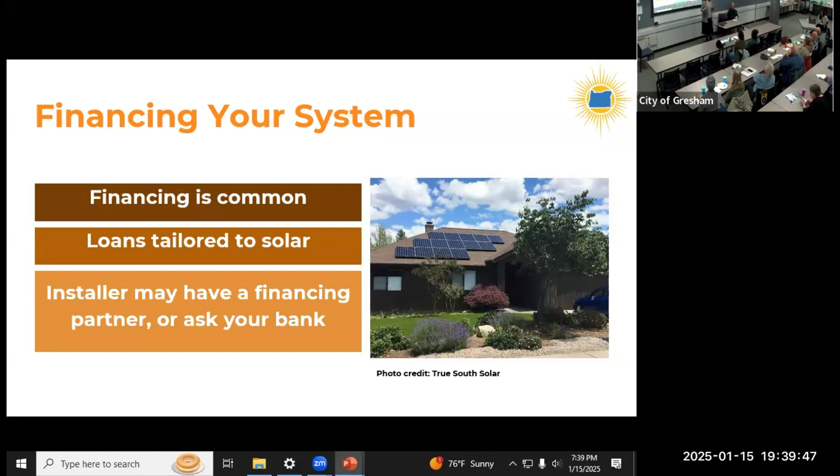Okay, so I'm gonna just jump into the end of this presentation and then we'll have time to connect with folks on more questions. So financing your system is pretty common. There are loans that are tailored to solar, and some credit unions might specialize in solar loans. Sometimes your solar contractor will also have a third-party option to finance your system. It's really important, though, to realize this is a financial decision, so you want to make sure you're looking at the fine print and at the fees associated with financing your system. And if you have a relationship with a local credit union or bank that you already work with, it's great to check with them first and see if they have some type of financing instead of working with a bank you're unfamiliar with.

And then we talked about the trade allies. So if you're looking to get the Energy Trust of Oregon incentives, you would work with a trade ally contractor. These contractors are vetted, they're more local, they work to install systems that last. And that's great if you have maintenance questions, because usually if you have maintenance or if you're looking to upgrade or update your system, a good first stop is checking with the company that you installed with. So you want to work with a reputable contractor that has a good reputation and will be around for a while.

And then a good way to get connected with these trade ally contractors is the solar bid tool that's on Energy Trust of Oregon's website. It's just a quick form. You can put in what you're looking for, if it's solar and storage, and then they'll connect you with those trade ally contractors in your area. And it's good to always get 3 quotes if you can, so you can compare those.

When looking at those, you'll want to look at the system size they give you, what they think their annual production will be, and also what fees they might have associated with the install. Brian brought up permitting, and permitting can range depending on what county you're in. In Multnomah County, sometimes that's a little bit longer, but it can just depend. Permitting time has gone down since we're out of COVID, and so we've seen those times decrease.